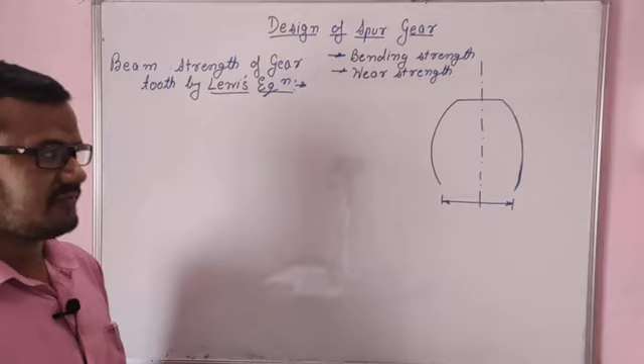Okay students, let us start with a new chapter, that is design of spur gear, right? Before starting the chapter, I assume that you are very well known to some of the basic concepts of spur gear, like say law of gearing. Then we are known with velocity ratio, gear ratios, some terminologies of gears and the types of gears, then the phenomena of interference and undercutting, then backlash. All these are the terms related to gears.

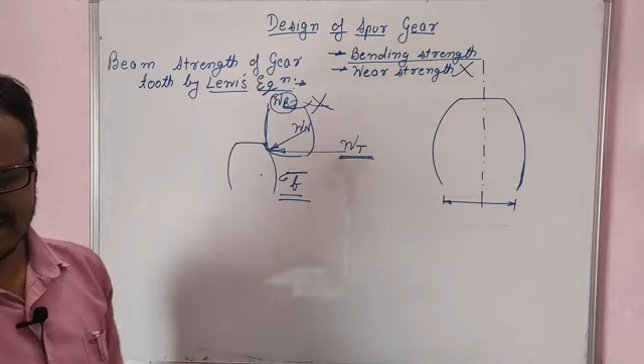Now before deriving that Lewis equation or finding out an expression for bending strength of a tooth, let us have some assumptions. Lewis utilized some assumptions for deriving an expression for bending strength, right? So let us see those assumptions.

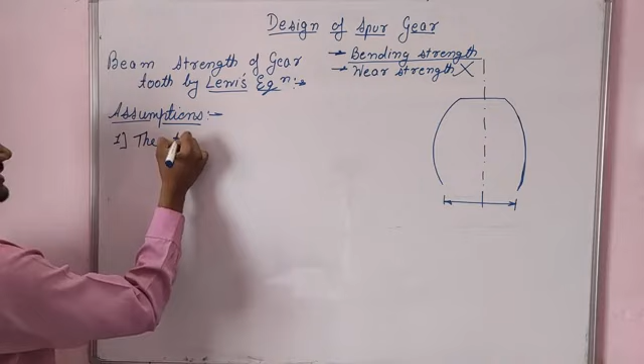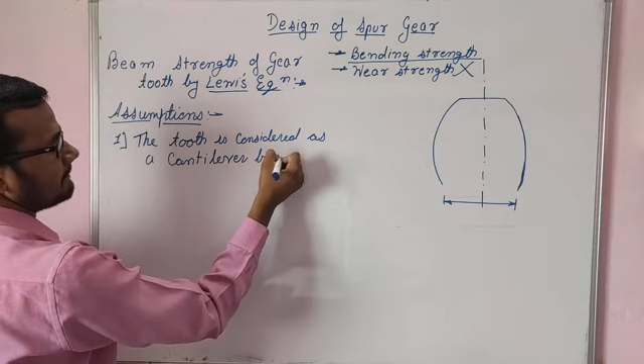Okay, now the very first assumption was that the tooth, since we are designing for a single tooth, the tooth is considered as a cantilever beam. Since we say that this is your tooth and some tangential force or normal force is acting, it is being fixed somewhere here on the pitch circle. That means

it can be assumed as a sort of cantilever type of tooth, somewhat this type of tooth fixed somewhere here, and some tangential load WT is acting over here. So a tooth is always considered as a cantilever beam, will be your first assumption.

Now the second assumption is, we have said that there will be some tangential load and some radial load, and it may be the case that वहाँ पर shear भी develop हो. So the direct shear, that is tau, and the radial stress is neglected.

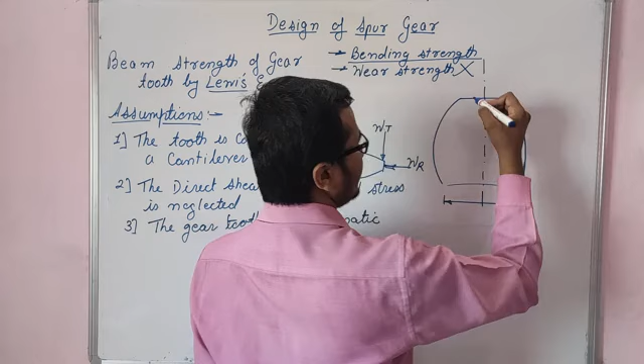Right? This will be your second assumption, that is the effect due to the radial load WR will be always neglected, and the shear stress which may be getting produced is also neglected. The third assumption is the gear tooth is prismatic. Prismatic means it is having same geometrical shape throughout, right?

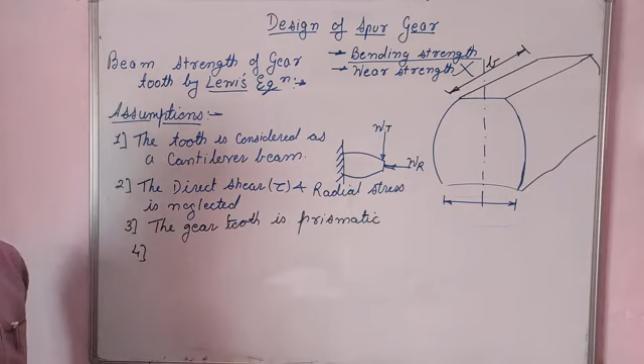So we can say that this is your gear tooth, having some face width, say the face width is B. So this is one of your assumptions. The fourth assumption is the errors in tooth manufacturing are neglected, or we are considering that there is no error in the tooth, then the deflection is also neglected. Deflection is neglected,

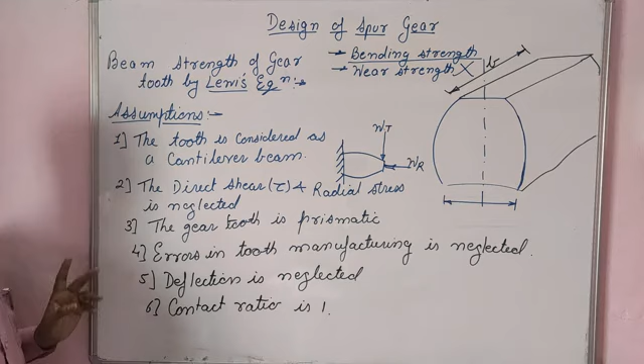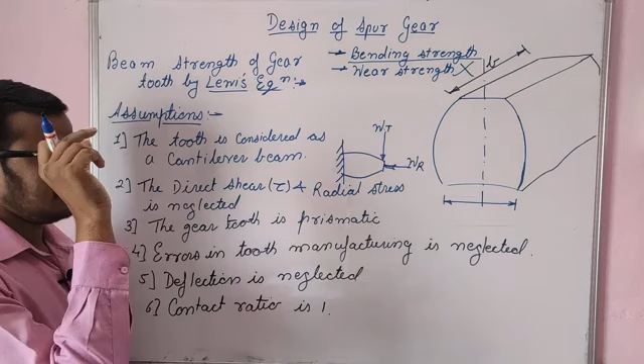and the last assumption is the contact ratio is assumed to be 1. We have these assumptions while deriving the Lewis equation. The Lewis equation is derived for finding the bending strength of the tooth. So the assumptions are the tooth is considered as a cantilever beam, a pure cantilever beam where some load which is perpendicular to the axis of the beam

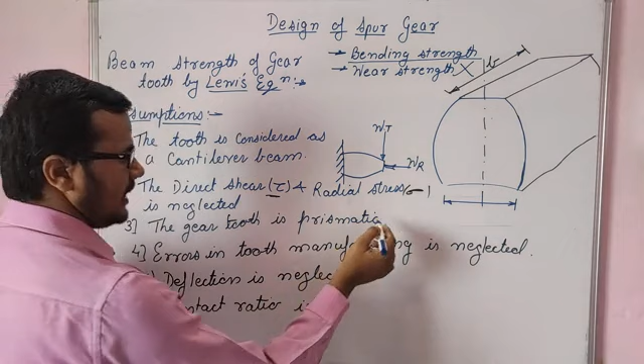will be acting. The direct shear stress, that is tau, and radial stress, sigma, is neglected, and this radial stress will be produced by the radial load. If some amount of radial load is acting, then the stress due to that radial load will be neglected. The gear tooth is purely prismatic. Errors during the manufacturing are neglected, deflection is neglected, and the contact ratio is considered as 1.

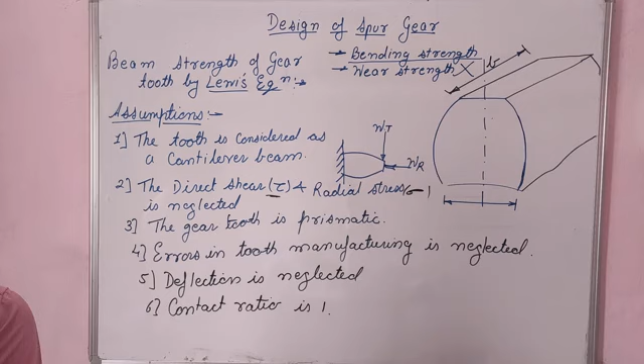Now when we talk about the beam strength, then

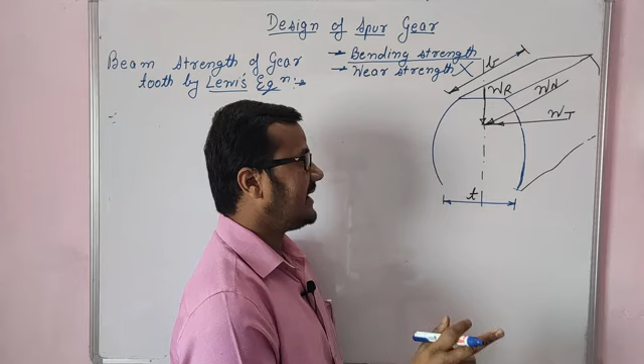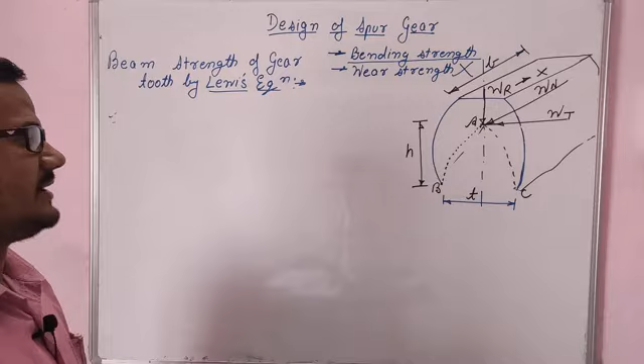That is this parabolic region. Let us name point A, point B and point C, where length BC is your thickness. Let the length of the parabola be the height h. Since the effect of WR is neglected or very nominal, direct radial stress is neglected or equal to 0. The only stress will be produced due to WT, and that stress is bending stress.

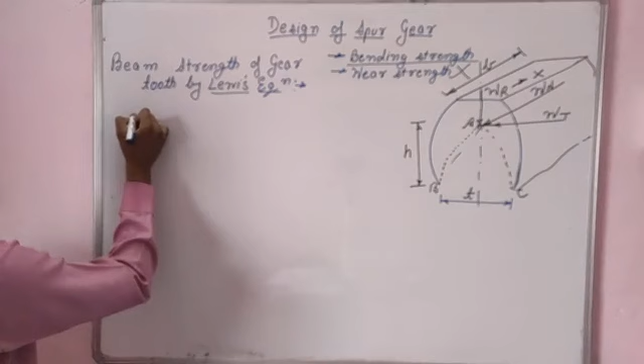And we know the flexural formula says M/I equals sigma by y. M/I, that is bending moment upon moment of inertia, should be equal to stress upon y, the distance from the neutral axis. So this sigma is nothing but the working stress, sigma w.

M/I equals sigma w upon y, where M is the bending moment. The maximum bending stress will be at BC, so the bending moment there will be equal to WT into this distance, and since this distance is h, M is equal to WT into h, that is tangential load into the distance from the point of maximum stress, h, or L.

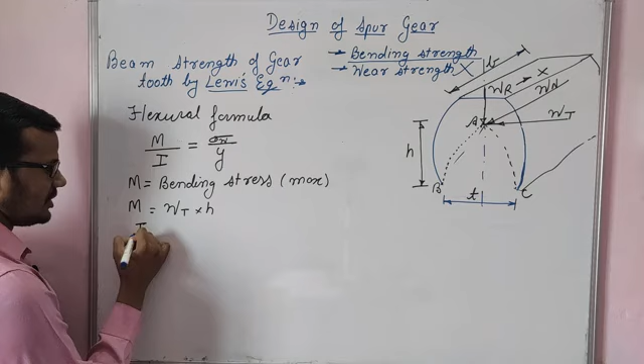Okay, I is your moment of inertia, and it will be equal to B t cube by 12 along the center line of the parabola, right.

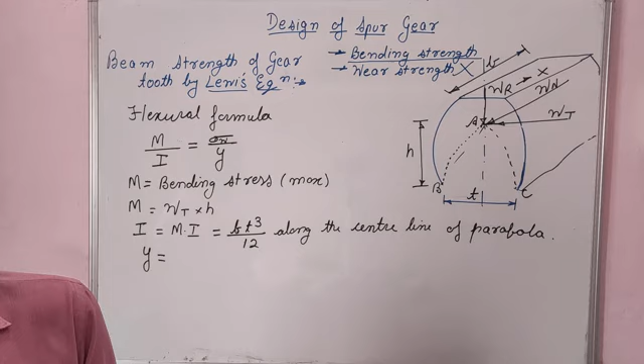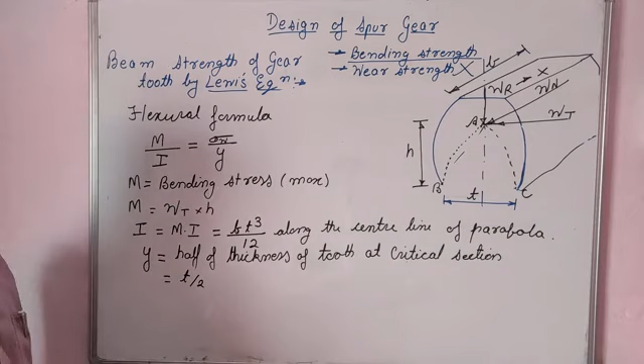The I will be moment of inertia, and it will be equal to bt cube by 12 along the center line of the parabola. We have y is nothing but distance from the neutral axis, right? And can I say that y is the distance from the neutral axis, that is half of the thickness of the tooth at the critical section, and I can say that y is nothing but t by 2. The value of y will be t by 2, and okay,

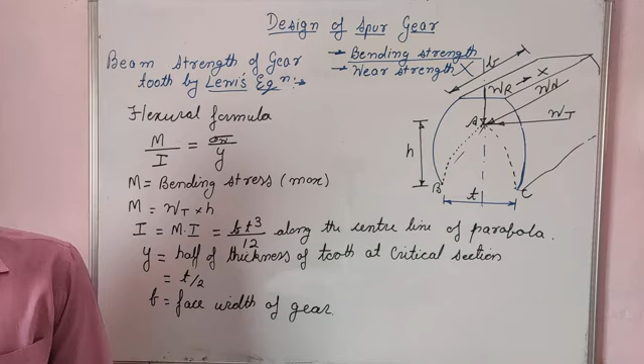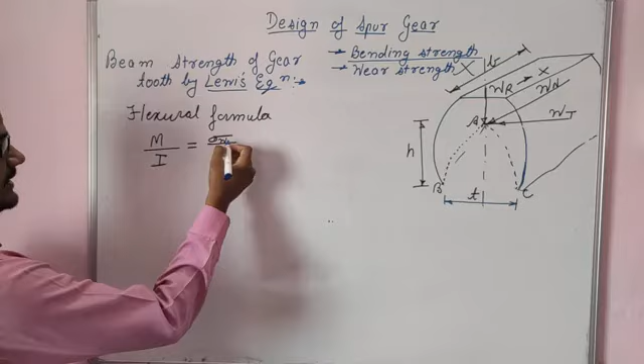here b is nothing but your width or face width of gear, right? Okay, now since we have all the values, if we substitute these values in the expression, can I say that sigma w will be equal to M into y upon I, will be equal to, now M is nothing but Wt into h, right? We understood this earlier, that Wt into h is your maximum bending moment at the most critical point, that is at BC, into y is your t by 2 upon I was bt cube by 12.

If we solve it, 2 and 12 cancel, t will get cancelled, so I get sigma w equals 6 into Wt into h upon bt square. Now can I say that finally Wt, that is the maximum tangential load, will be equal to sigma w into bt square upon 6h, right? So Wt, that is tangential load, is equal to sigma w into b into t square

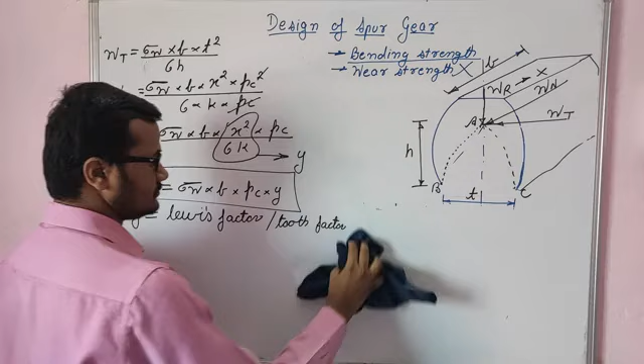Now, okay, now since we have y is equal to x square upon 6k, right, now y is equal to x square upon 6k, और हमने अभी यहाँ कहा था कि जो x है that is equal to t upon pc and जो k है that is equal to h upon pc, right? x is equal to t upon pc and k equals to h upon pc, right?

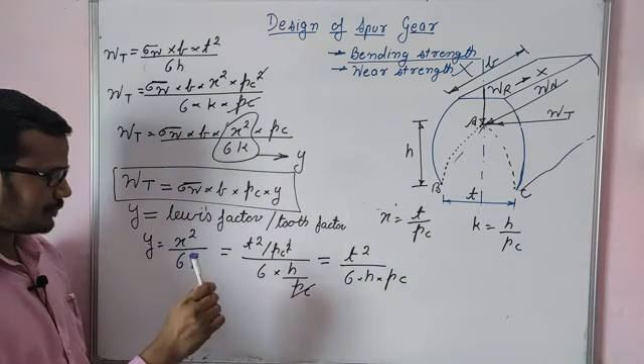y is equal to t square upon 6 into h into pc, right? y is equal to t square upon 6 into h into pc, and this is your value of Lewis factor y, right? Now this y is the value of y, Lewis factor that depends, right?

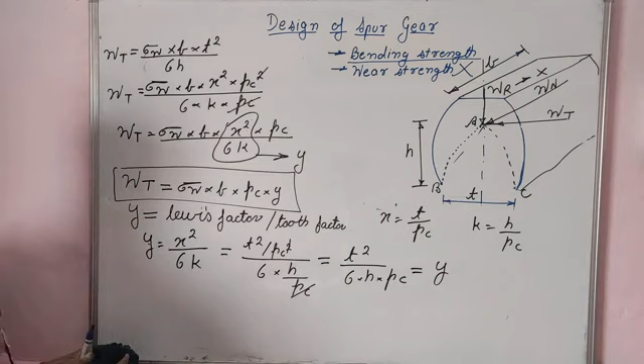The value of y depends on number of teeth. So the Lewis form factor y will be equal to 0.124 minus 0.684 upon t, where t is number of teeth, and this expression will be used for 14.5 degree full depth teeth, right?

And if it changes, the value of y will be equal to 0.154 minus 0.912 upon number of teeth for 20 degree full depth teeth, and the value of y will be 0.175 minus 0.841 upon t for 20 degree stub teeth, right?

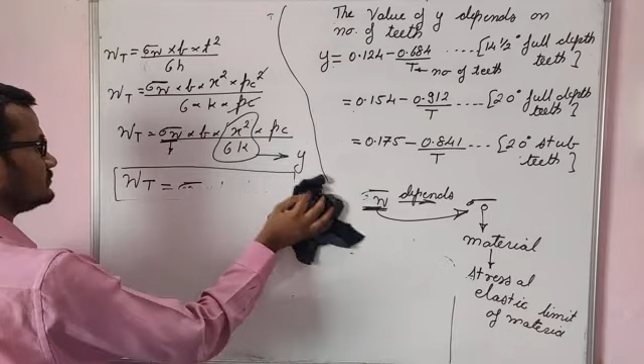Okay, we have seen Lewis equation. Lewis equation states that the bending strength is equal to sigma w into b into pc into y, where sigma w is working stress, b is the face width of the gear tooth, pc is circular pitch of the gear tooth, and y is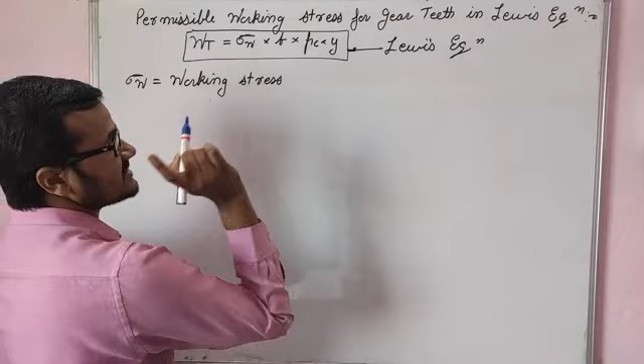The working stress. Now, working stress is the stress which will be acting while the two gears are in mesh, right?

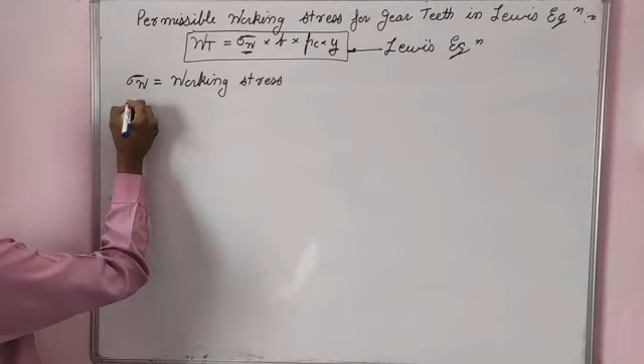So can I say that sigma w decreases as the pitch line velocity increases, right? That means sigma w can be found in terms of the pitch line velocities, right?

Now we always find sigma w with respect to the static stress, sigma 0. It is a static stress, or static stress, that is sigma 0, depends upon the material of the gear. It depends upon the material of the gear, that is the stress at the elastic limit.

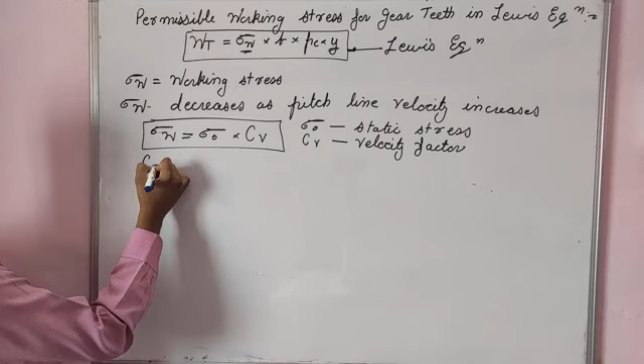Now the value of CV will be different in every condition. CV will be equal to 3/(3 + V), where V is linear velocity, right, and it will be equal to 3/(3 + V) for ordinary cut gears. Okay, let me write out all the conditions.

Okay, we saw the Lewis equation. The Lewis equation says that the bending strength is equal to sigma W into B into PC into Y, where sigma W is the working stress. Working stress is related with the static stress sigma 0 into the velocity factor CV. Sigma W is equal to sigma 0 into CV, where CV is the velocity factor, sigma 0 is the static stress, and sigma 0 depends on the material.